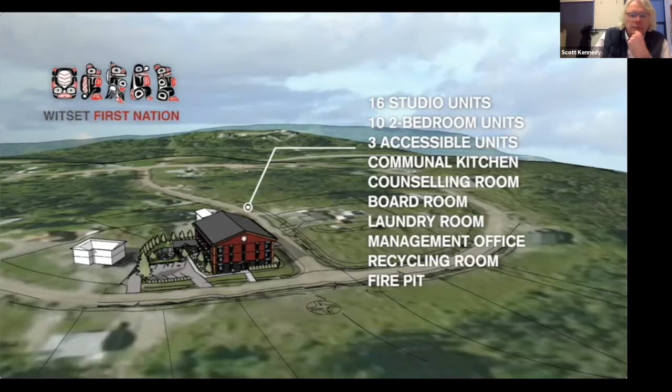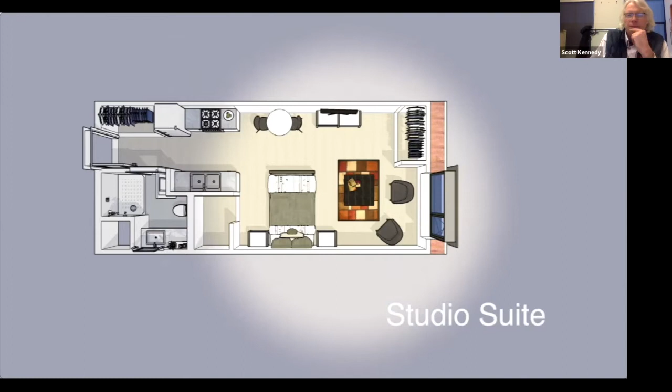Witset. The music is by the local band. Located on Seaton Road, it is intended to address the affordable housing shortage within the Witset First Nation. The project will provide 16 studio and 10 two-bedroom apartments. Three of the ground floor suites will be set up to accommodate persons with disabilities. Other facilities include a common room with a kitchen to allow for life skills training, a counseling room, a boardroom, a laundry area, a recycling room, and a building management office. The exterior of the building will be finished with cementitious panel siding and standing seam metal roofing to minimize maintenance costs. There are sunshades on the south, east, and west exposures to control overheating on hot summer days, and the sunshades will provide interest and color to the facades. The surrounding grounds will be outfitted with a covered outdoor lounge area, a fire pit for social gatherings, and patio areas. There will be parking for 8 vehicles and a covered parking area with electric outlets to accommodate 8 bikes. The entry area will be constructed using log timbers and feature locally created art. Studio suites have an entry area and closet flanked by a bathroom outfitted with a shower. There's a galley kitchen with 24-inch appliances leading to a living space which can accommodate a bed and a sitting area. Off this room there's a second closet and a storage room designed to accommodate a small chest freezer.

Two-bedroom suites have an entry flanked by a bathroom outfitted with a tub shower. There's a galley kitchen featuring 24-inch appliances leading into a dining room and a living room. Two bedrooms and a storage room designed to accommodate a small chest freezer open off the main living area.

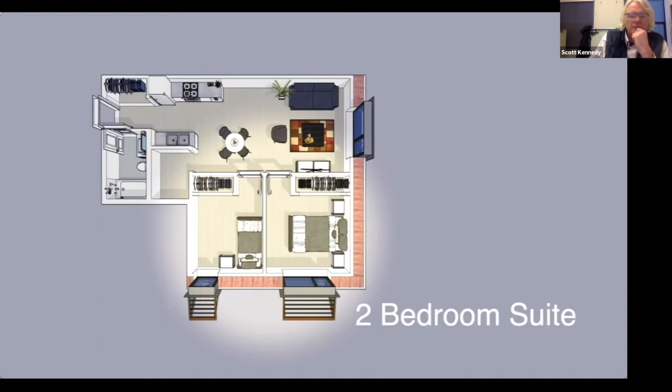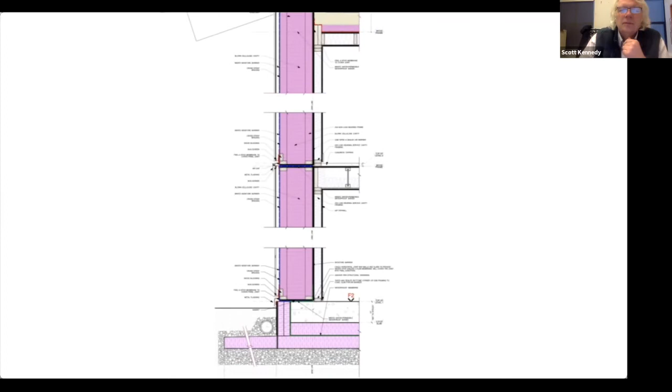The project will be built with attention to both its impact on the environment and its future operating costs. To reduce heating energy, the walls will be 24 inches thick and filled with blown cellulose insulation, which is preferred as it is derived from wood fiber, a renewable carbon-sequestering resource.

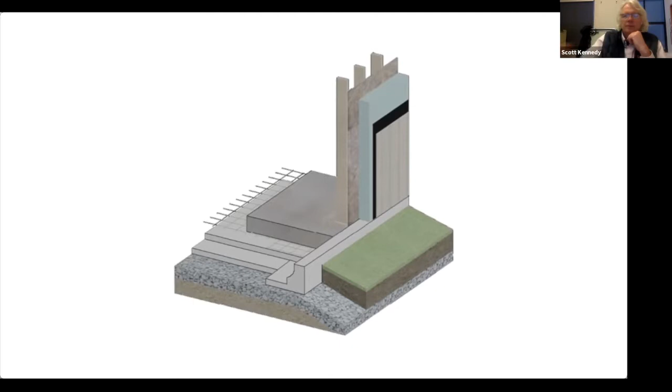Windows will be triple glazed in triple sealed, multi-point locking window frames, and the building will sit on 12 inches of expanded polystyrene insulation to insulate it from cold winter ground temperatures. To ensure against drafts and cold spots, great attention will be paid to connection details to ensure that they are airtight and free of thermal bridges.

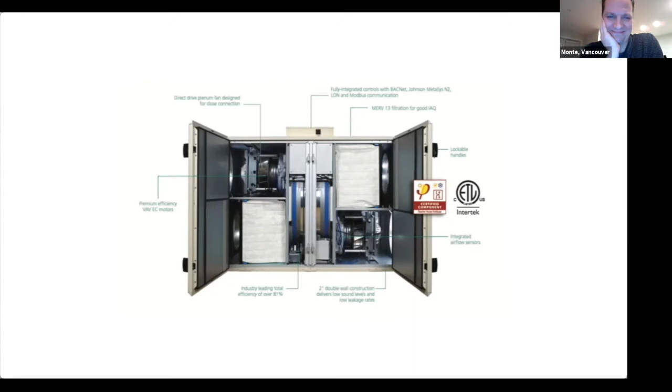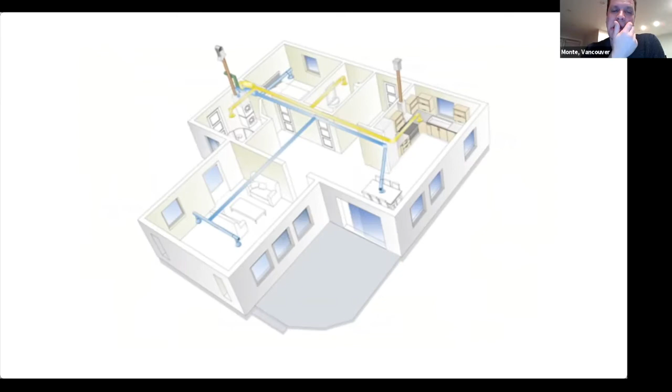To maintain air quality in the building, an enthalpy recovery ventilation system will be installed to provide 24-hour continuous fresh air to every bedroom and living room. The system will extract air from bathrooms and kitchen areas and recover 80% of the heat and moisture energy from it, transferring it to the incoming cold fresh air as it is exhausted.

There is no recycling of air between suites. The air will be tempered to provide some cooling in the summer, and a portion of the heating energy required in the winter, with cold weather suitable heat pumps feeding coils in the fresh air system.

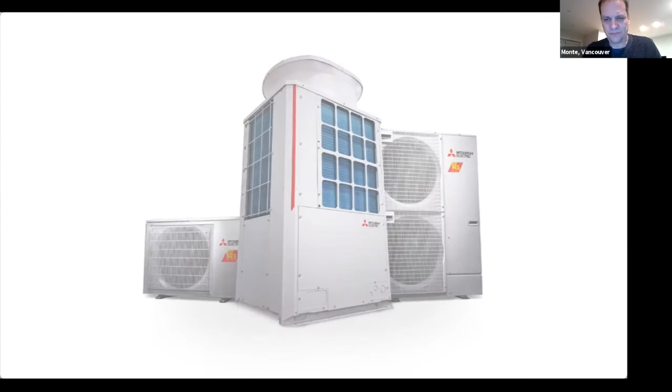There are two central ventilation systems, one serving units with a north exposure and one for the south exposure, as each system can then adjust to solar conditions.

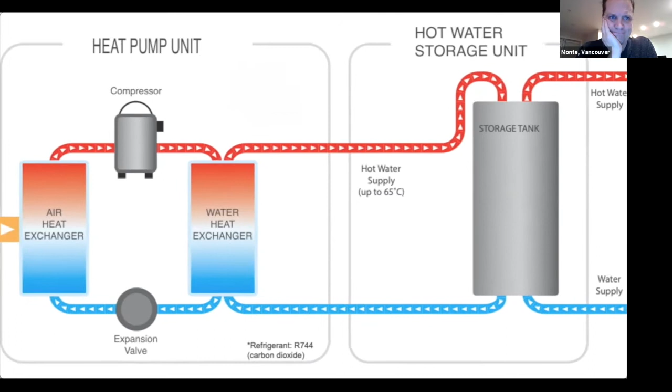Fantastic. Thank you, Scott. That's very cool.

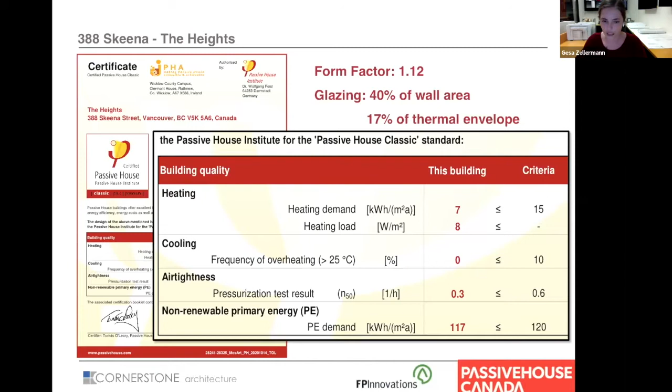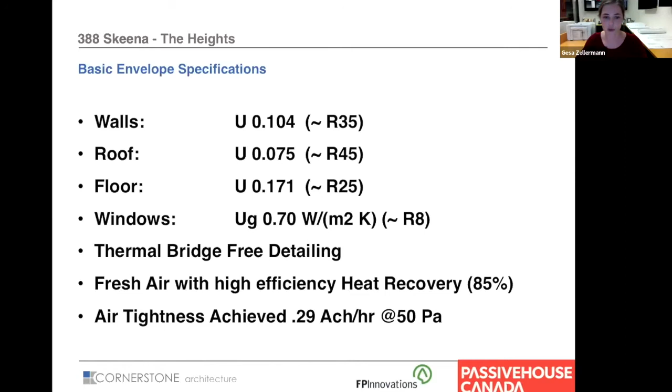The basic building envelope is probably more effective than required, and this is because we were chasing primary energy the whole time. Trying to keep this one under 120 was our biggest challenge. We probably would have looked at lower solar heat gain glazing, for example, if this hadn't been the main issue.

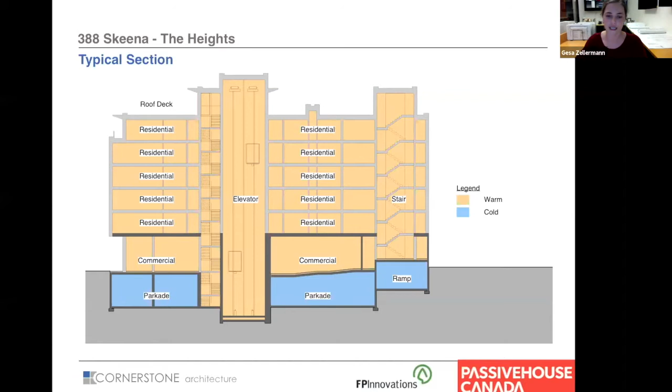The project is very dense - 72% of the units are one-bedroom and studio apartments. And when we look at the annual heating energy balance graph from the PHPP, you can see that the internal heat gains are huge, which is probably because of the density of the project.

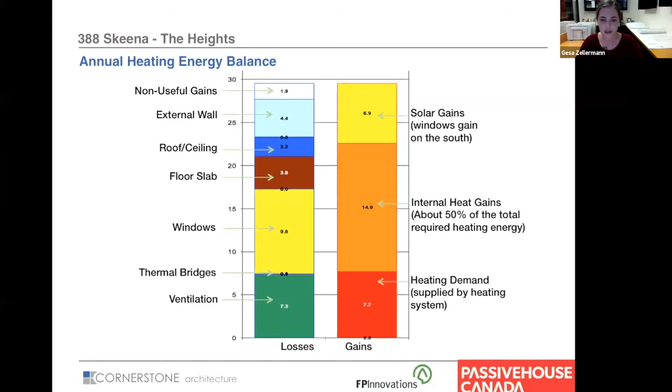It was interesting for us to see that the thermal bridges didn't have a big impact at all on the project. So really comfort and health became more important than the energy performance. Retrospectively, the thermal bridges of the parkade probably were not the biggest concern.

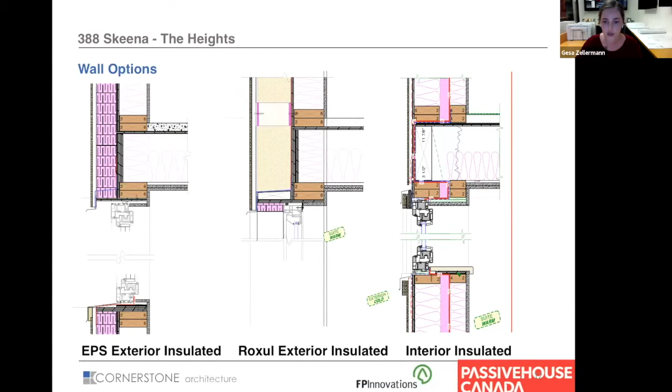Envelope details. We looked at different approaches, exterior insulation with Roxul and EPS, and the interior insulated version. We then went with the interior insulated wall, fairly conventionally framed with conventional siding installation, which helped us with detailing. The area could be finished up inside in dry conditions.

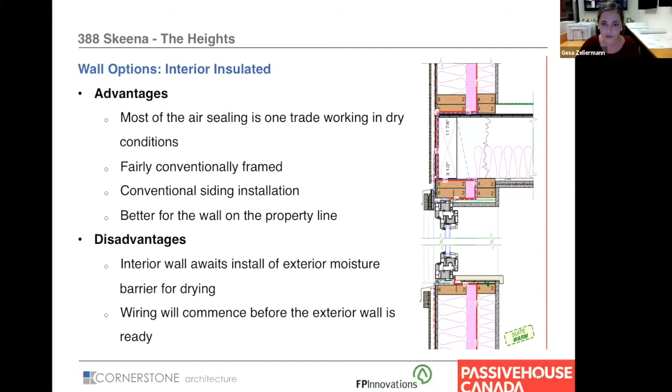There were some sequencing issues. Peak built full-scale mock-ups of the walls, which we had in the office first, then we hauled them to site, and they were hugely important and became a good reference point for everyone. We did a WUFI analysis of the wall. You can see some movement, but all within range.

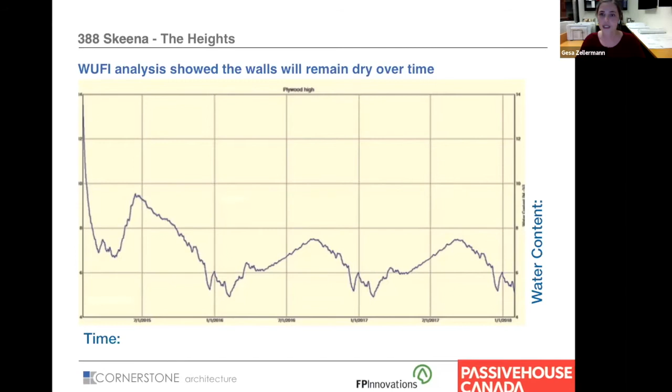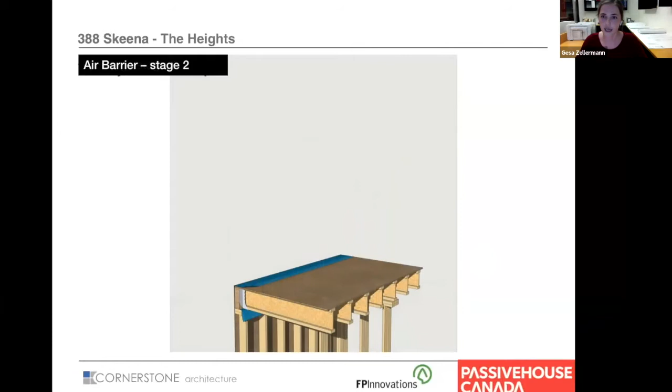Then for the sequencing of the wall, first we framed the exterior 2x6 wall. We put the air barrier on top, built the floor, wrapped the air barrier around the floor and joist. Then we framed the next level on top of the overlap, put the moisture barrier on, in this case the Siga MajVest.

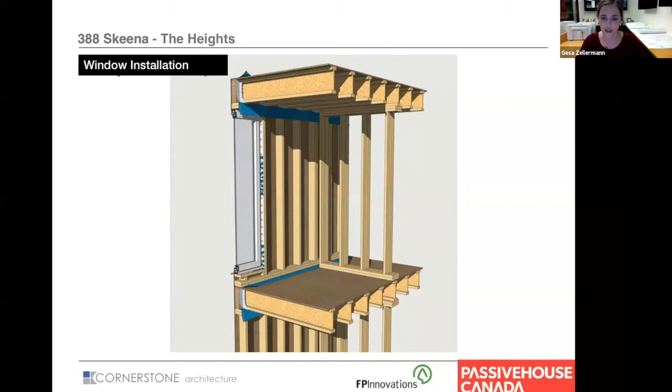We installed and insulated the exterior wall with batt. We installed the Quik-Therm, which is 2 inches of EPS with a polymer face that became our air barrier, taped the MajVest to it, taped the window frames to it, installed the interior service cavity wall, and insulated that with batt as well.

So this is the same thing in progress. You can see the moisture barrier and the air barrier wrapped around the floor ends. Then here is the taped air barrier.

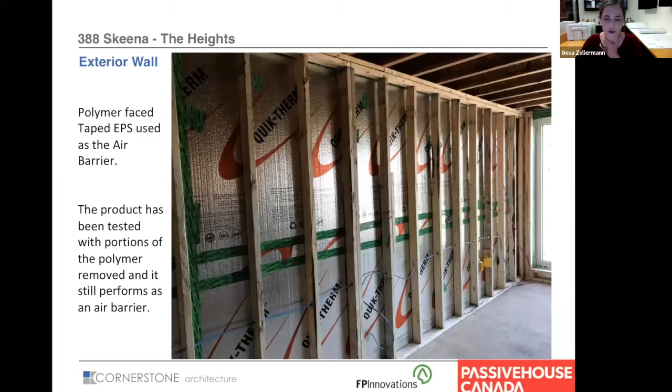The trades took great care in fixing all the little nicks that happened, but the product was actually tested with some polymer missing and it still performed fine. The Euroline ThermoPlus was the only locally made Passive House certified window at that time.

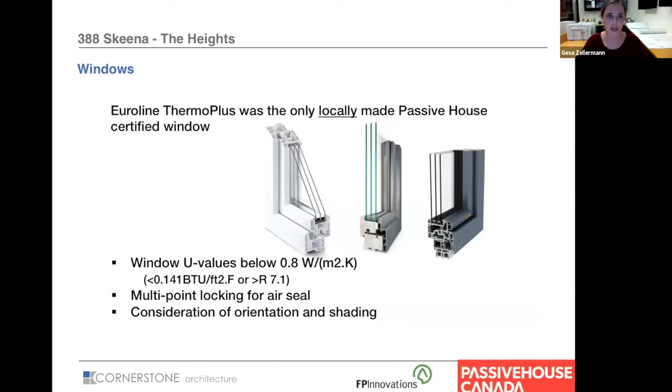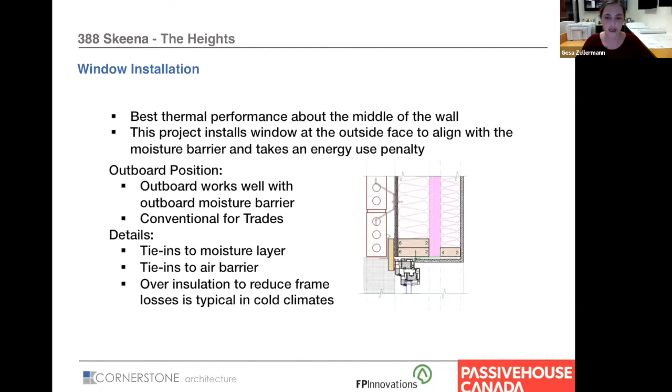So we used this window and added some low solar heat gain glazing on the west facade. We opted for installing on the outside face, which is conventional for trades here and in line with the outboard moisture barrier. When you look at the therm model, the install is not ideal, the isotherms are quite bent, but Vancouver is quite mild, though very wet, so this install was worth the energy use penalty for us.

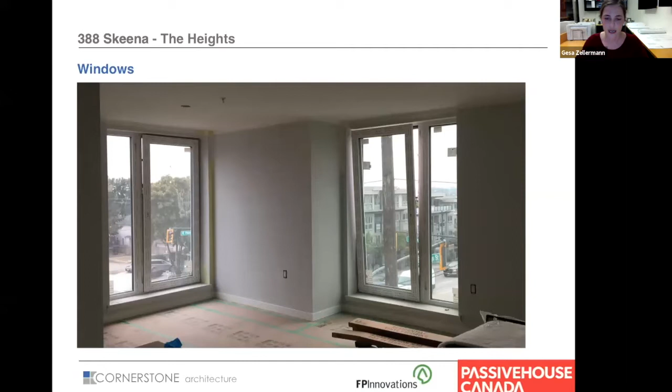This is a corner unit facing southwest. You can barely see the low solar heat gain coating on the glass. But this is another thing Passive House became great for us, because it's located on a very busy street, so noise is not an issue with an envelope like this.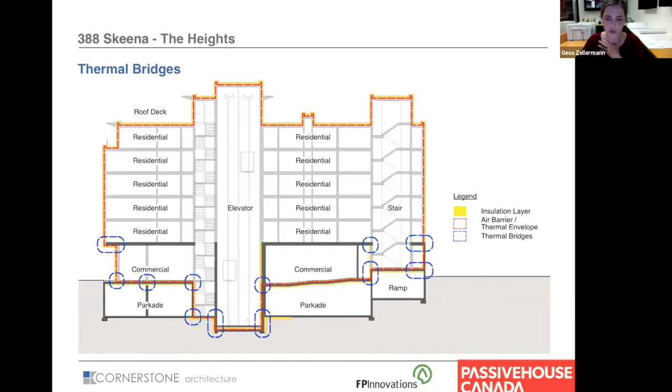To ensure continuous air barrier, we kept the inside walls off the exterior walls so we can install the air barrier continuously and have easy access for taping and sealing. This is the floor junction where you can see in the detail the air barrier wrapped around the joist ends, and the therm performs quite well.

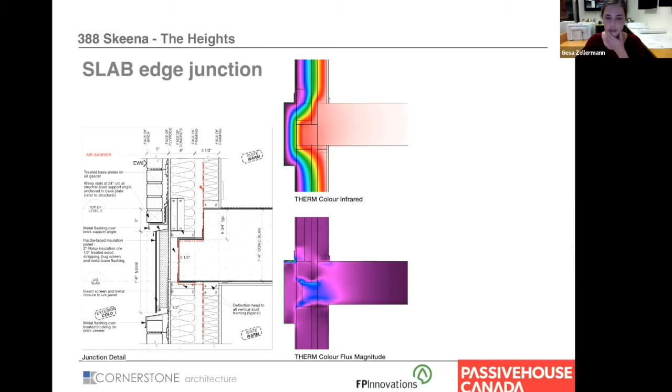This is the slab edge junction. We notched the slab so we can install the guardrails on that level thermally broken, and we had some extra insulation on the outside of that slab edge there.

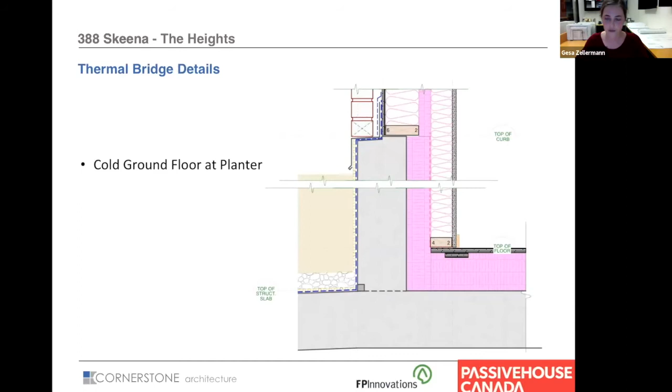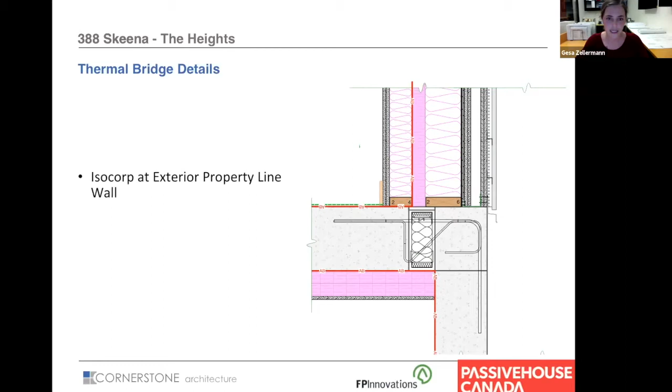This is a cold concrete slab at a planter where we shifted the planter wall outside to add extra EPS and insulation on top of the slab. We were looking at isocorps, but then opted for insulation on top and bottom instead. This is a balcony deck transition with extra insulation on top.

We installed sunshades on the south side of the building, fastened to the rim joist. Probably could have chosen a bit more dense profile. And then on the left, a steel canopy installed with wood as a thermal breaker.

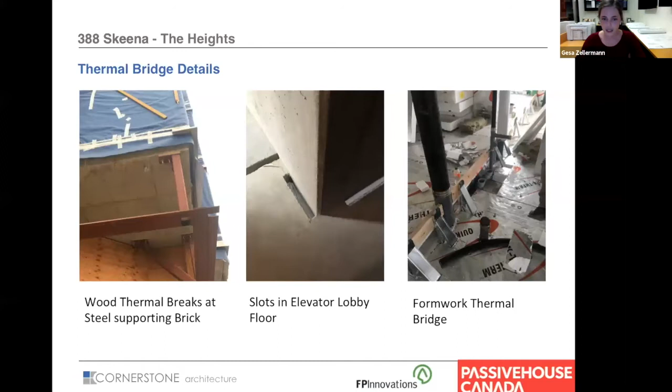In the middle is the elevator shaft at the elevator lobby floor, where we kept a gap and insulated that to try and keep that connection as minimal as possible. On the right side, you see the commercial area with EPS on top of the concrete, but we did forget about the formwork that then got embedded in the EPS and became thermal bridges.

Air tightness testing: we achieved 0.29 air changes per hour, which was very exciting.

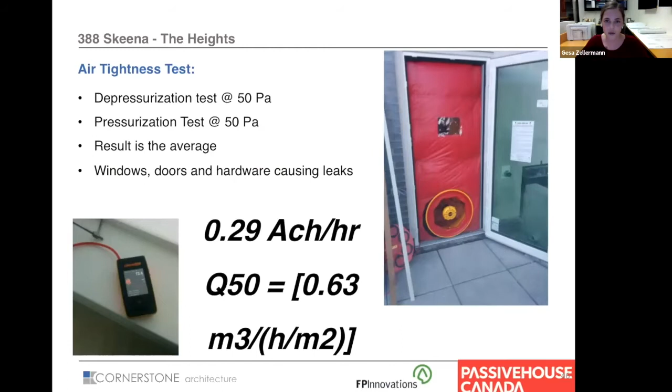Probably the biggest issue was the parkade doors, which had to be rated, and we couldn't source good doors, so we just ended up using standard parkade doors.

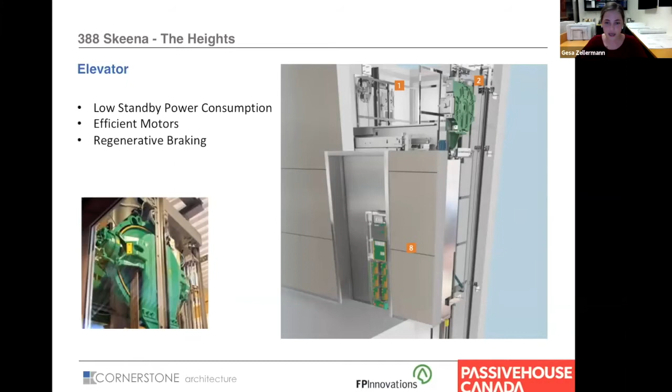For building systems, elevator, we used the KONE EcoSpace, efficient motors, low standby energy consumption. We insulated the inside of the elevator shaft with rock wool, and we kept all components thermally broken with 4 inches of wood blocking.

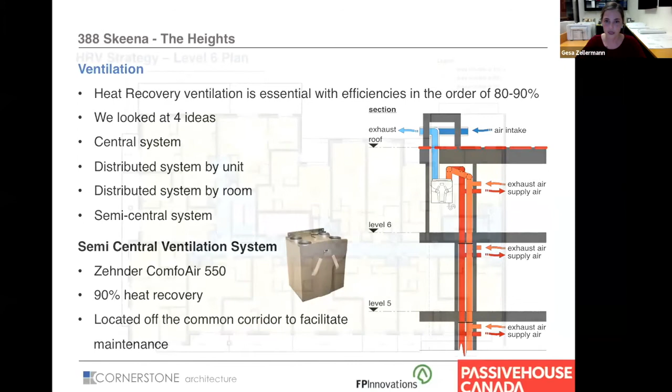For ventilation, we looked at 4 different ideas, but then went with a semi-central system. We used 19 Zehnder ComfoAir 550s, located on level 6, and then each of those HRVs vertically serves a stack of up to 5 suites with fire dampers on each floor lane. This allowed us to keep the runs to the exterior quite short.

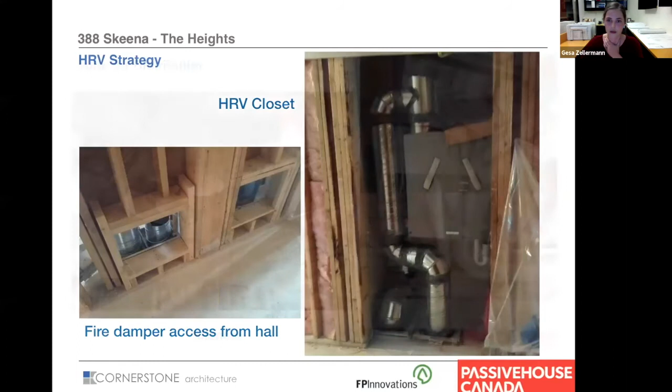Easy access for building management to access the HRVs for maintenance, exchanging filters, etc., without the residents having to access anything. That was earlier, fire damper and HRV.

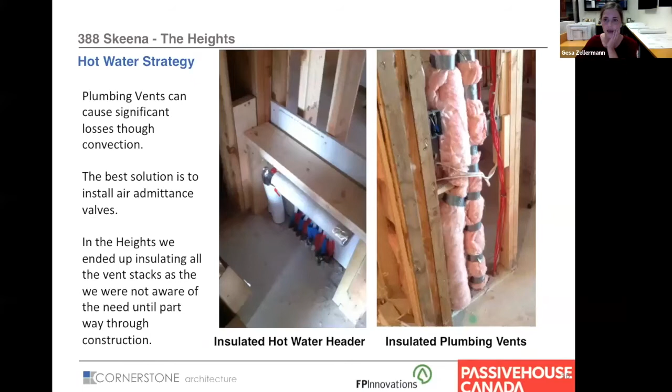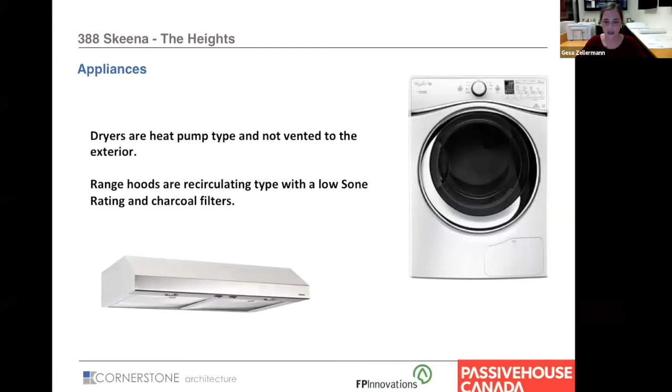Plumbing vents can cause significant losses. We overlooked that in the beginning, so we ended up wrapping them with insulation in a panic in the end. For appliances, we are using efficient appliances such as heat pump type dryers and recirculating hood fans, which took a little bit of convincing with the municipalities, but then were approved in the end.

And now Scott and the monitoring. Everybody hear me fine, I assume? So what we did is we did do some monitoring of the building.

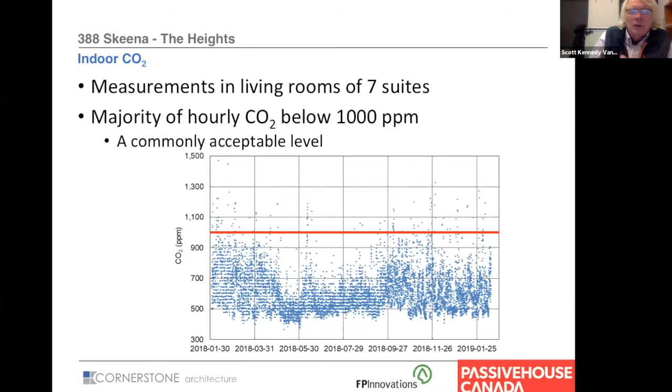We also looked at indoor CO2. The red line represents 1,000 parts per million, and you see generally the suites are really kept in a zone between 500 and 700 quite well. We get the odd occasional spike, but that's a party or something going on, I assume.

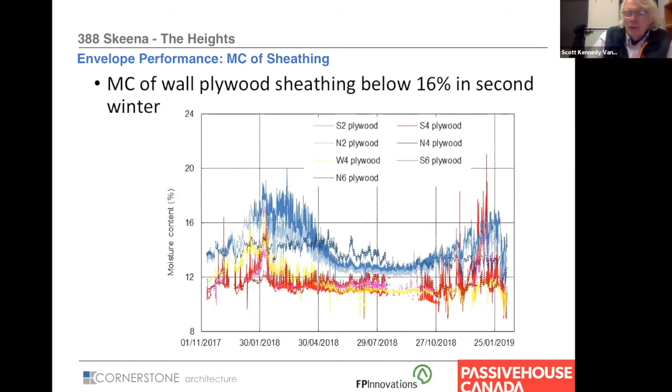We looked at this because we had the sheathing on the outside of the building, and Vancouver has this tradition of leaky condo problems based on too much moisture on the sheathing line. We did monitor the moisture on the sheathing line, and we did find that it stayed well within the parameters. It just briefly went out of the parameters every once in a while, but nothing we were concerned about at the time.

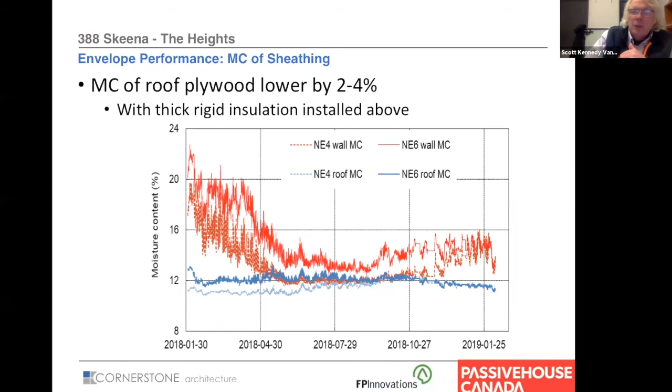We did a split insulation on the roof, so we have some of the insulation above and some in the cavity in order to take advantage of the cavity. We again measured the moisture content on the plywood at that interface, which was not what you would think is ideal under the building code, but we did some WUFI analysis and felt it would perform well, and the monitoring proves that it does. You have to remember a roof is open to the night sky, or the winter cold sky, which is much colder, but it seemed to be performing quite well.

We also monitored a bit of shrinkage in the building because it's a 6-story building, fairly early in doing these things, and we looked at the shrinkage. We did find that the exterior walls didn't shrink as much as the interior walls, so we saw a little bit of shortening on those interior walls relative to the exterior walls.

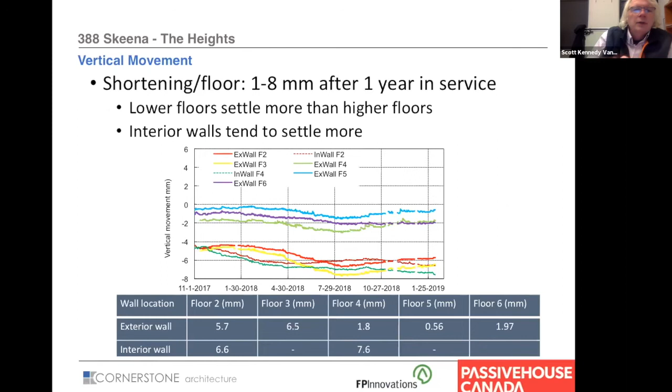This is really the issue that we face with this building, is that it is a hot building. It tends to be much warmer than we thought. We believe, as we go through it, it's mostly to do with internal heat gains being much higher than what is assumed in a PHPP. We're going to talk about that a little bit.

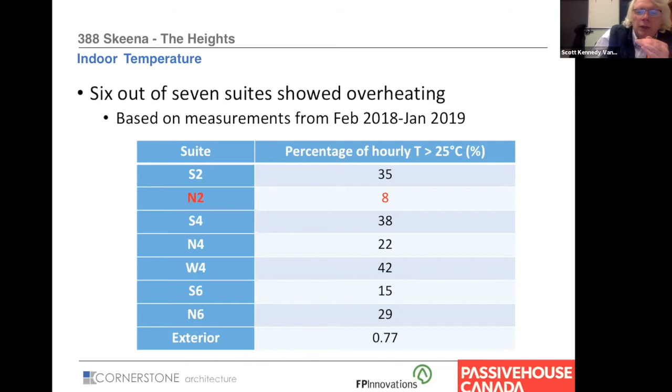So one suite on the north met it, but even some of the north suites were overheating. So that can't be solar heat gains, that has to be internal heat gains. So that's something that we learned on this building, and something important we felt was a lesson to take forward in what we do from now on.

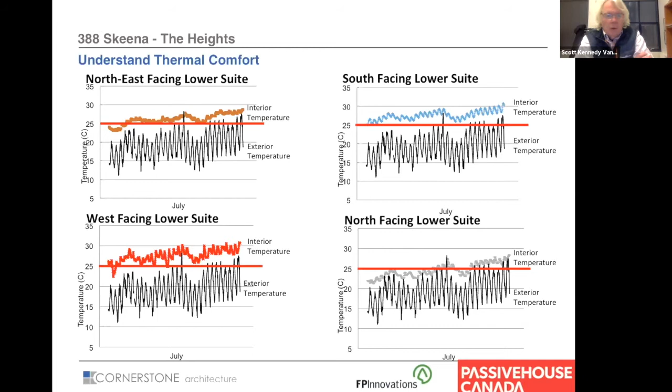In July, we found that again some of the suites were quite badly overheating, even the north. So you can see that's an issue we're trying to deal with in the building.

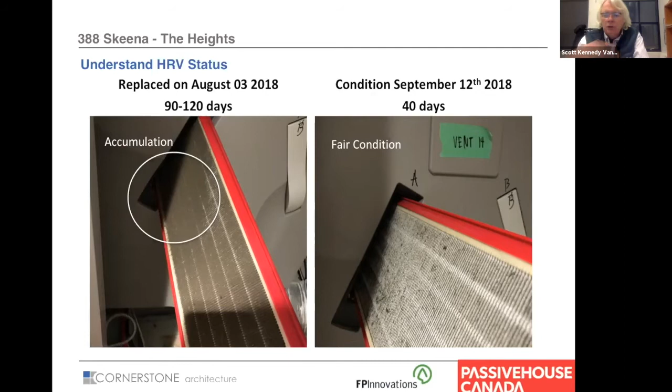We were on a busy street, so we wanted to see how often we'd have to change the filters. In something in the order of 3 months, these filters got pretty dirty, so we had to come up with a slightly more rigorous schedule for changing filters in the building.

We find that even on colder days, there are a lot of windows open in the building on the south face. That's all part of the operation of the building we have to think about as we move through working these buildings.

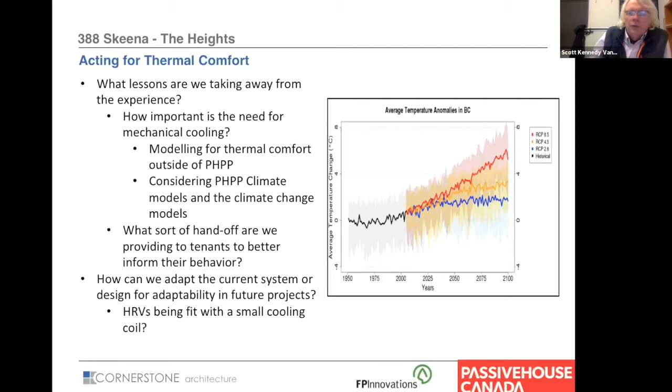The other piece is we really hadn't even been talking about climate change at the time we did this. We realized that a lot of the climate data we use is actually old data, not new data. I know there's been lots of discussion, and I know there are tools coming in the PHPP to help us rethink some of those things, particularly for this overheating event we need to think about.

So these are a few of the conclusions: overheating was an issue, CO2 seemed to be fine, relative humidity seemed to be fine.

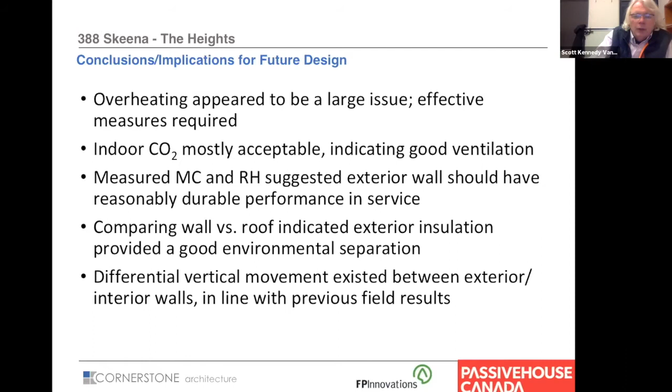The way this HRV system works is interesting. Each of those 5 suites is on one HRV, but the suites all have a button in the kitchen and a button in the bathroom, where if you press it, the HRV will speed up for all 5 suites for about 20 minutes. That seems to have been a very good strategy and worked quite well in this building, and it's one we're contemplating doing on a very small project we're working on right now.

So now let's look at the energy performance of the building. I managed to get from our utility power company the actual energy consumption of the whole building. Now this includes the parkade, so it's not purely PHPP-related energy, but this is kind of the profile of the energy use in the building.

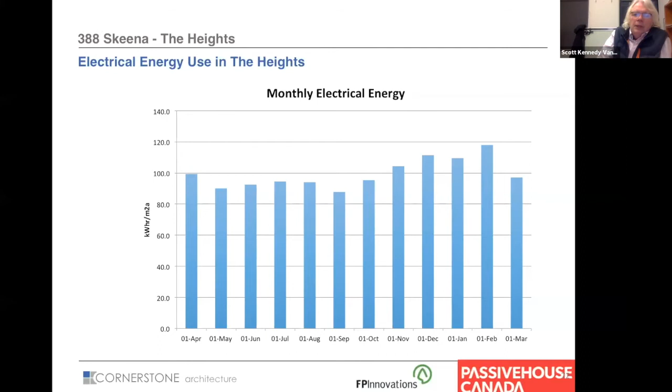You'll see that it's actually fairly flat, and you don't get all that big a peak in the winter months. That's telling you that we have a passive house and it's working wonderfully.

Part of that is because we're not using much energy for heat in the suites, and part of it is, I think, we need to also be looking at these parkades and other facilities in the building that are outside the PHPP when we think about energy consumption. That's something we're going to try to refine as we move forward, but we're happy to do passive house buildings. One thing I did do is look at what would happen if we replaced the gas heating with the Sanden units.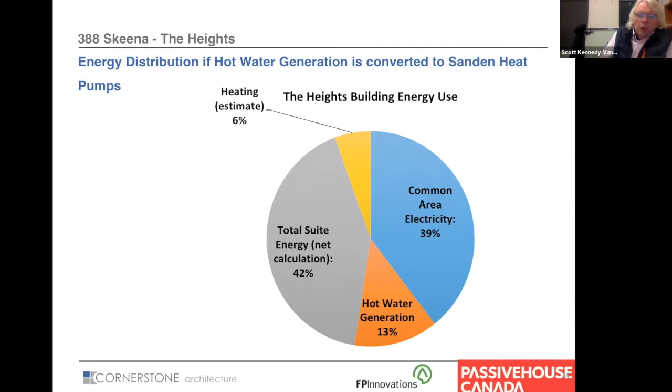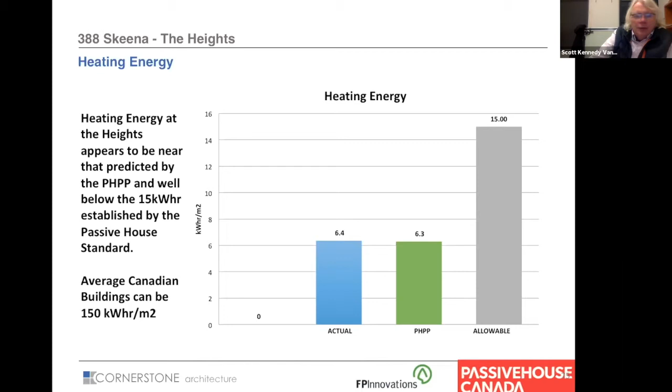So this is what we estimate the heating energy for the building to have been, and you can see that it's very, very close to the PHPP. That said, we have some internal heat gains aiding that, but I also think we have some opening windows even in the winter that are probably penalizing that. So I think we know that passive house works. There's clear proof that it's really a great way to go in a cold, heating-dominated climate like we have here.

The other piece we were looking at was the plug loads going on in the suites. I was able to extract these because I had the total energy consumption for the building, and the bills from the owner for what he was paying for the common area meters. When I subtracted the two, this is what I got. The PHPP was telling me we would use about 100,000 kilowatt hours, and we ended up using closer to 230,000 kilowatt hours.

That is something significant, and that is going to turn into internal heat gains in the building. I think we need to be analyzing these buildings for that as we move through thinking about these things.

My friend Lynn, who's on the call here today, has always talked about how when people live in a passive house or a building that's supposedly green, they kind of get a little laissez-faire and think the building's doing it for me, my behavior doesn't have to help. Maybe that's not true when we think about lights and other such energy. That's just a reality, and we've got to think about these things as we design buildings.

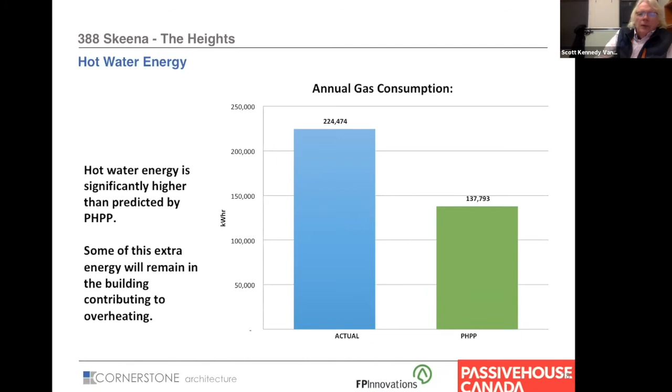So this was something else we looked at in the building: the actual gas consumption. This is related to hot water use primarily. This is kind of what we ended up with in the PHPP versus what we actually found in the building. And again, when you're putting this much extra hot water in the building, you're going to contribute to overheating of the building.

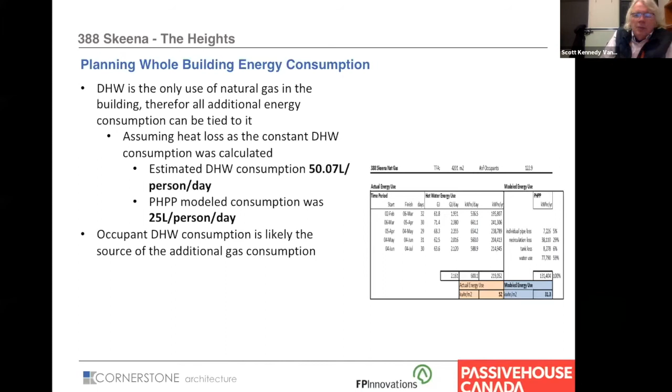We don't actually measure how much hot water is flowing in the building, unfortunately, so I relied on an engineer who came up with a formula. He said it's probably around 50 liters per person per day, which is about double what is modeled in the PHPP. We don't have full data on that, and we're hoping to build a building that will get us better data sometime in the future. Actually, it's coming up pretty quick.

The one thing I did look at was, hey, if we change the gas hot water heaters to heat pump hot water heaters, what would happen to the kilowatt hours per square meter per year, which is part of the passive house metric. You can see it's a major difference when you convert to something about 3.5 times as efficient from something that's probably running about 90% efficient.

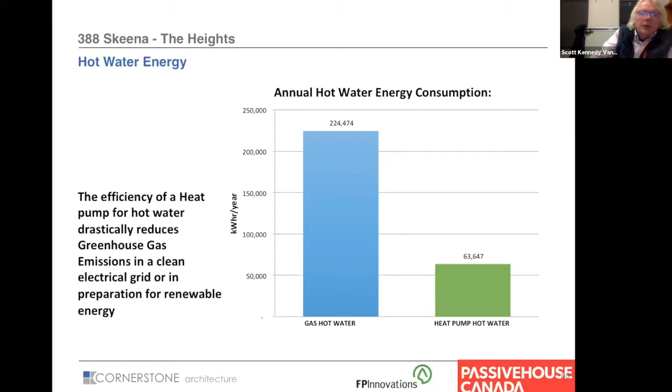This is an important thing as we move on to electrifying our buildings. That said, if we converted to heat pumps or something similar, it would still cost our developer a couple thousand dollars a month more to operate, and thus the $170 carbon tax, which would level that playing field out for sure. So that's something I think is going to be very useful as we work through this.

Here in BC, we have a thing called the STEP code, which has an ultimate total energy use intensity of 100 kilowatt hours per square meter per year at our highest step. So I looked at the building again and said, well, as it's performing right now, it's about 117. But if we change the heat pump hot water, it would be 87. But if we add cooling back in, it's going to be a little bit higher, so I think these are important things we have to think about.

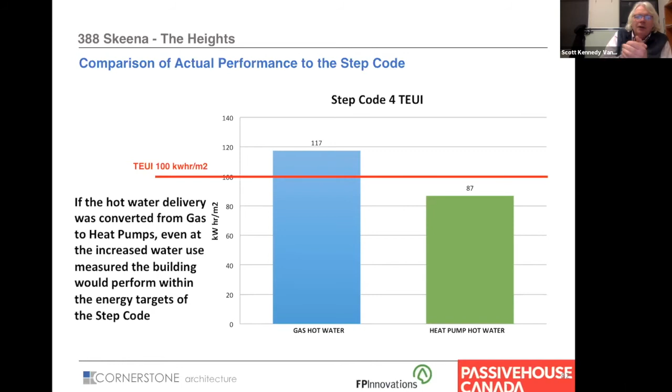I know there are other savings in this building, which we're bringing into some of our other buildings, particularly in the parkade part. But this is a tough target to meet—a TEUI of 100 is going to be very hard to hit.

So this is a building literally a block away that we're tendering. I think the drawings go out tomorrow for tender. But at any rate, this building, we have a bit of a grant to do some monitoring in. We're going to be working with RDH and with Integral to actually get some better data on the building. And we took a few lessons.

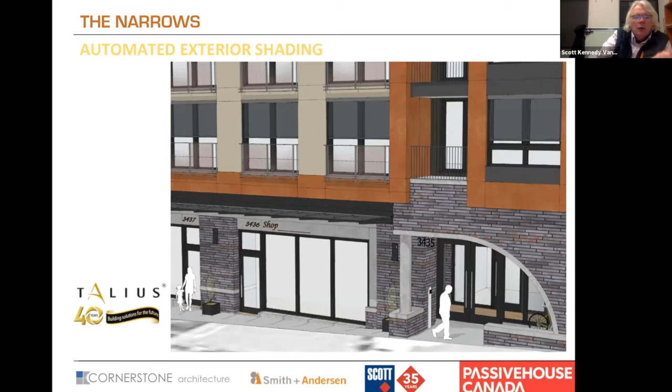One of the things we've done on this building is we're putting operable blinds on the south face so we can cut those solar heat gains down quite considerably. We're still playing around with what actual coating on the window we're going to use in conjunction with that. Second thing is we're putting a central ventilation system in.

We're using 2 large units in this building, one for the north, one for the south, and we're putting a central cooling and heating coil on those units using heat pump technology, which will really help mostly in the summer in terms of trying to keep those temperatures down if those internal heat gains are as high as what we think.

The third thing we're doing, we're going to a Colmac heat pump on this one, and our engineers are using the Colmacs—they have fans in them—and they're actually going to use the fans that run these Colmac heat pumps to also provide the ventilation in the parkade. So the idea is to share the energy of the fans to do 2 jobs: ventilate the parkade and generate the hot water for the building.

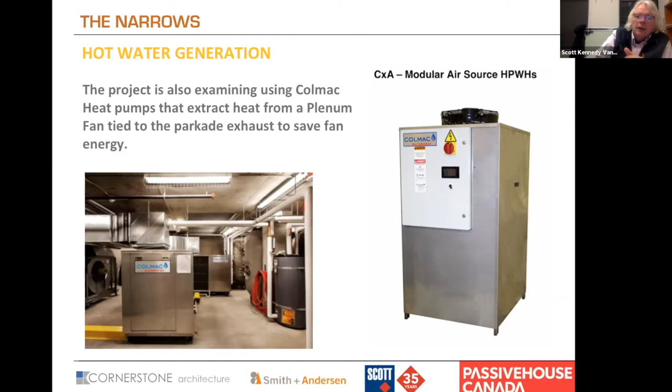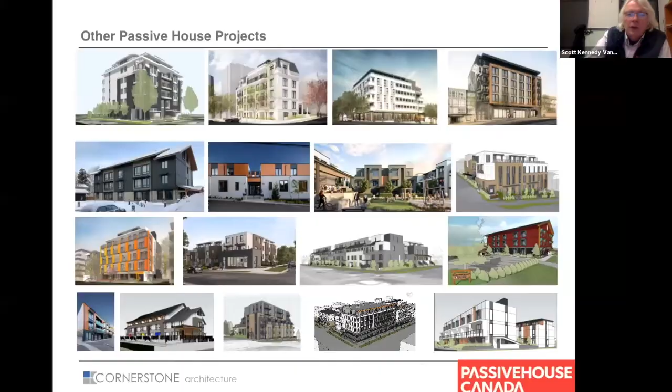Did everyone get that? 95 slides, I think it was. And it's funny, Gesa, it took you like 10 minutes to get a glass of water. I was waiting, like, her mouth must be just dry like no tomorrow. And yet you just hung in there.